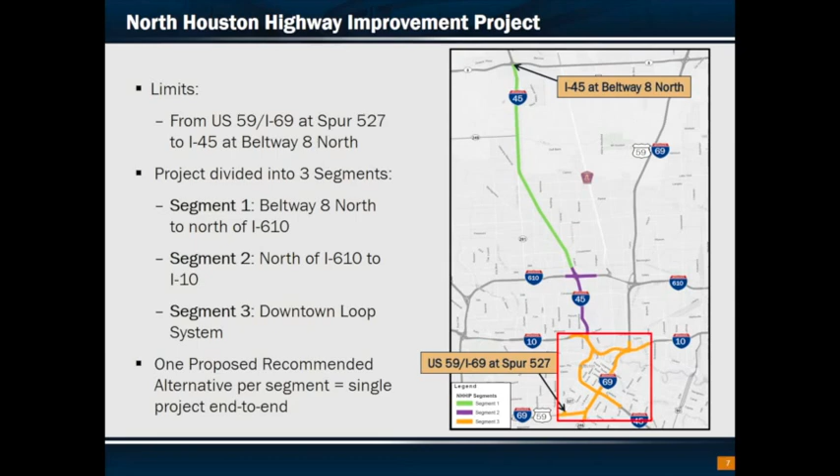To facilitate the development and evaluation of alternatives, the study area was divided into 3 study segments. Segment 1 is the north segment, from Beltway 8 North to approximately I-610, the North Loop. Segment 2 is the middle segment from approximately I-610 to approximately I-10. And Segment 3 is the downtown loop system, which includes portions of I-45, I-10, and I-69 in the downtown area, and State Highway 288 and Spur 527 south of downtown.

The proposed North Houston Highway Improvement Project is needed for several reasons. There is inadequate highway capacity for existing and future traffic demands on the highways in the North Houston corridor. Between the years 2015 and 2040, average daily traffic volumes in the project corridor are projected to increase by as much as 30%. Traffic congestion, which is measured by traffic volume and roadway capacity, will increase if no improvements are made.

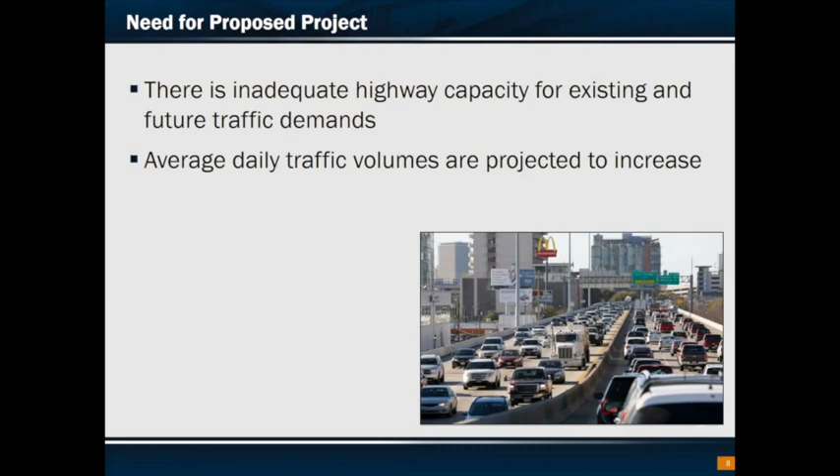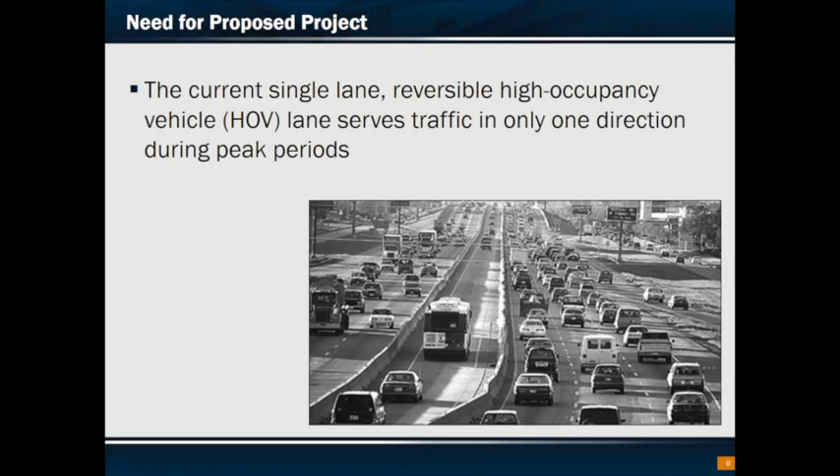The current high-occupancy vehicle, or HOV lane on I-45 serves traffic in only one direction during the peak traffic periods and is unused for large portions of the day. During peak hours, the HOV lane is congested. I-45 is a designated evacuation route for the region. At its present capacity, evacuation effectiveness would be limited in the event of a hurricane or other regional emergency.

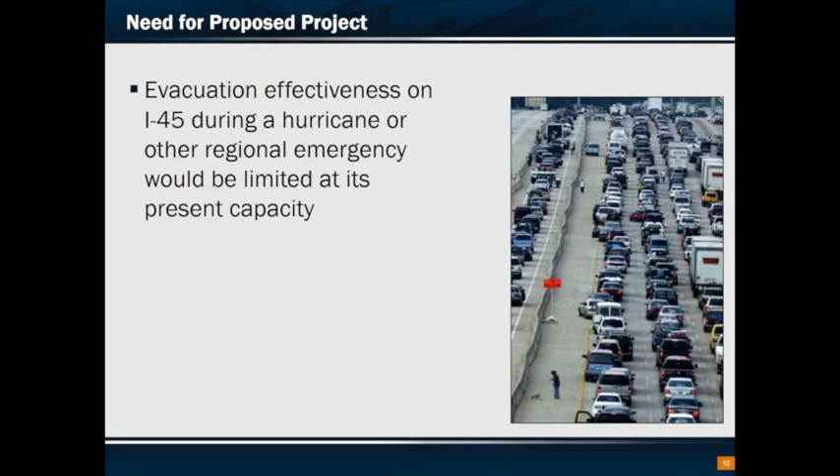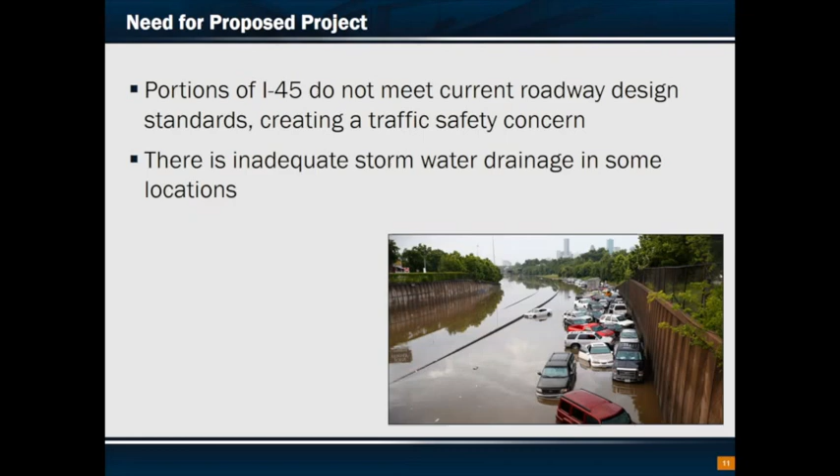Portions of I-45 do not meet current roadway design standards, creating a traffic safety concern. Roadway design deficiencies also include inadequate stormwater drainage in some locations. Intense rainfall causes high water levels at the I-45 I-10 underpass and on the outside lanes. I-45 would not operate effectively as an evacuation route with high water closures, especially during hurricane evacuations when high rainfall events are likely.

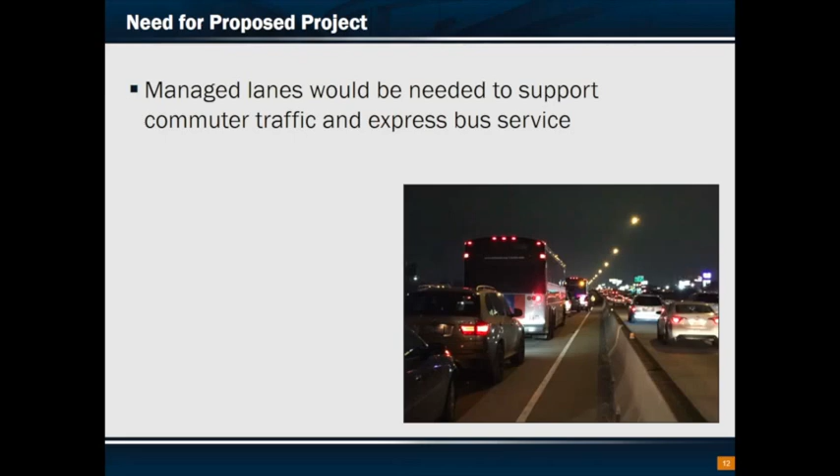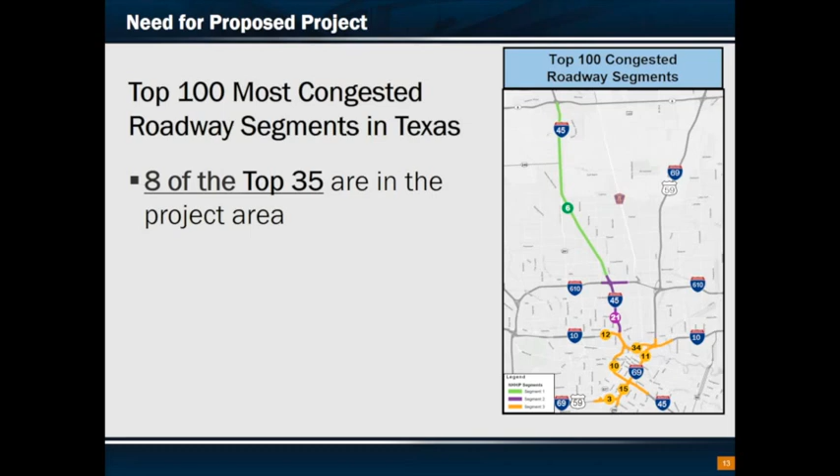Forecasts for commuter service indicate that even with parallel high-capacity transit in the corridor, two-way managed lanes would be needed to support commuter traffic and express bus service. Also, in the most recent ranking of the top 100 most congested roadways in Texas, 8 of the top 35 are in the project area. The purpose of the proposed project is to provide a highway facility with additional capacity in the I-45 Hardy Toll Road corridor to manage congestion, improve mobility, enhance safety, and provide travelers with options to reach their destinations.

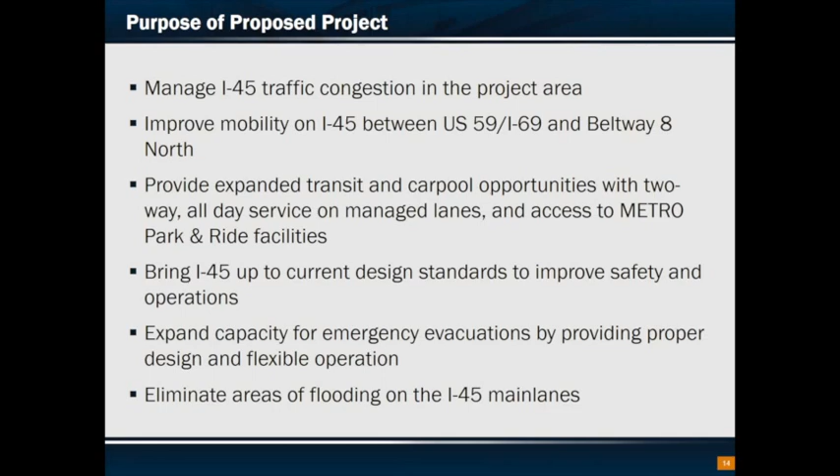Based on the evaluation of alternatives, one proposed recommended alternative was identified for each study segment. The proposed recommended alternative for Segment 1 would provide new capacity by adding 4 managed express lanes, also known as MAX lanes, 1 additional frontage road lane in each direction, and safety features, including full-width shoulders and accommodations for bicycles and pedestrians along the frontage roads. The MAX lanes would include both HOV and toll operations. New right-of-way would be acquired primarily from the west side of I-45.

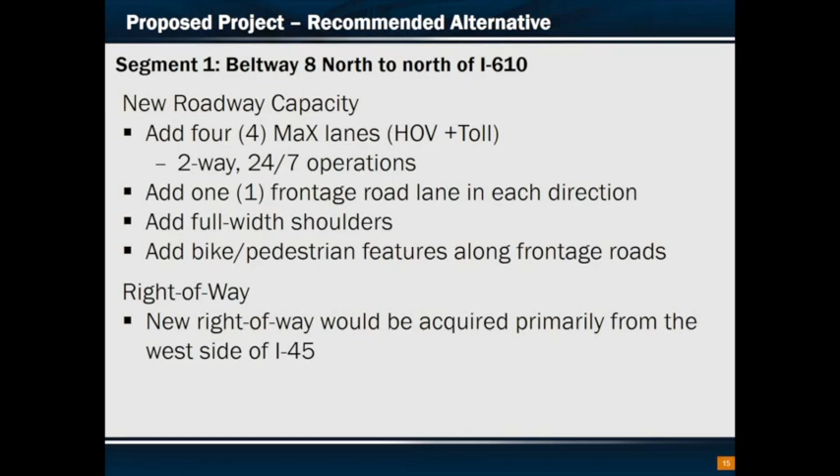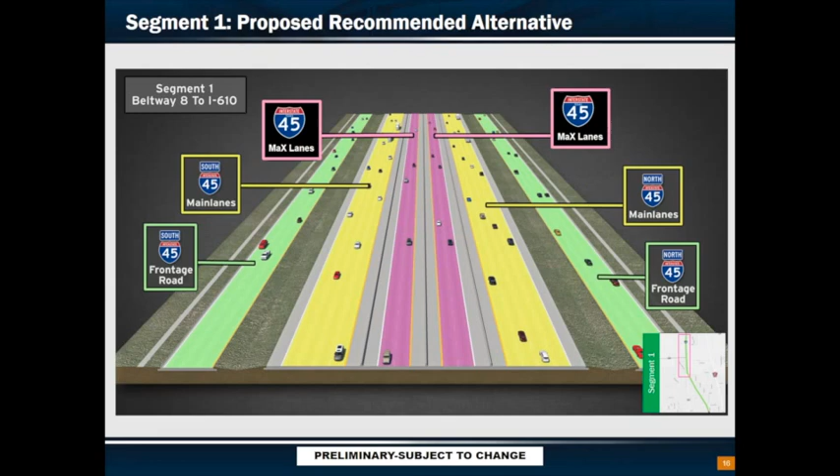This graphic is a rendering that shows I-45 in Segment 1 between Beltway 8 North and I-610. The proposed project includes 4 general-purpose lanes in each direction, 2 MAX lanes in each direction, and 3 frontage road lanes in each direction. Proposed improvements in Segment 2 include adding 2 MAX lanes in each direction. Added safety features would include full-width shoulders and accommodations for bicycles and pedestrians along the frontage roads. In Segment 2, the project right-of-way is constrained by Hollywood Cemetery, Germantown Historic District, and Woodland Park.

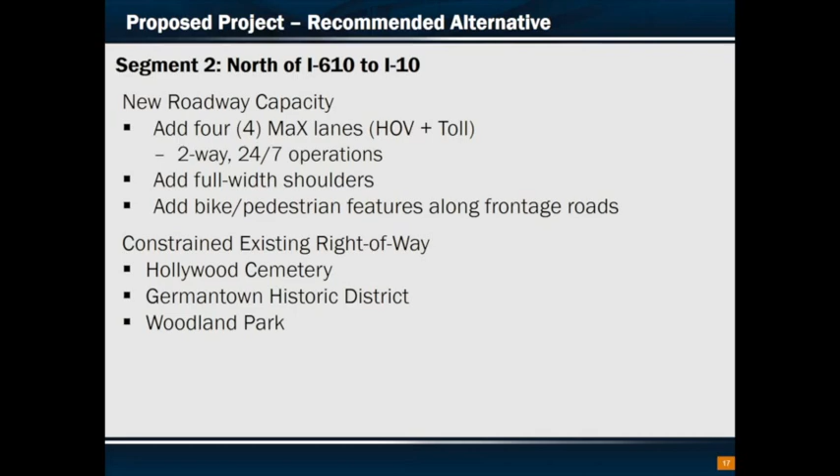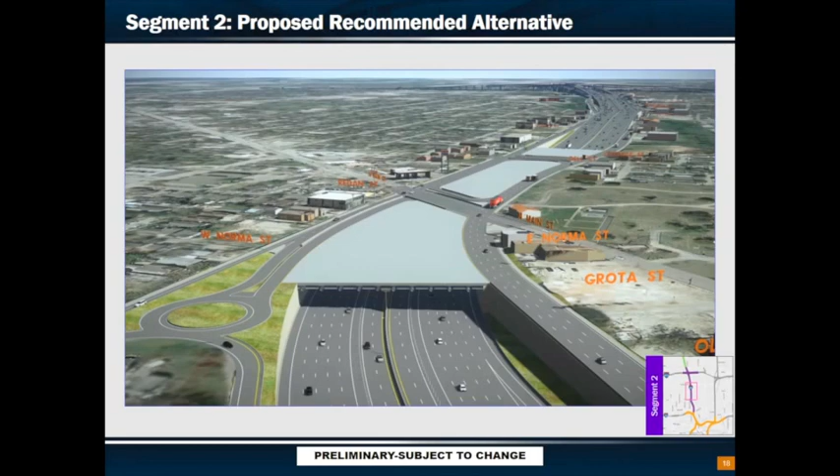This rendering shows the Segment 2 area near North Main Street, looking north at the depressed section of I-45. The general-purpose lanes and MAX lanes would be below grade, and the frontage roads would be at grade. This image shows a concept where the area between the frontage roads could be used as open space. The open space option is conceptual and would require additional development and funding partners to bring the concept to fruition.

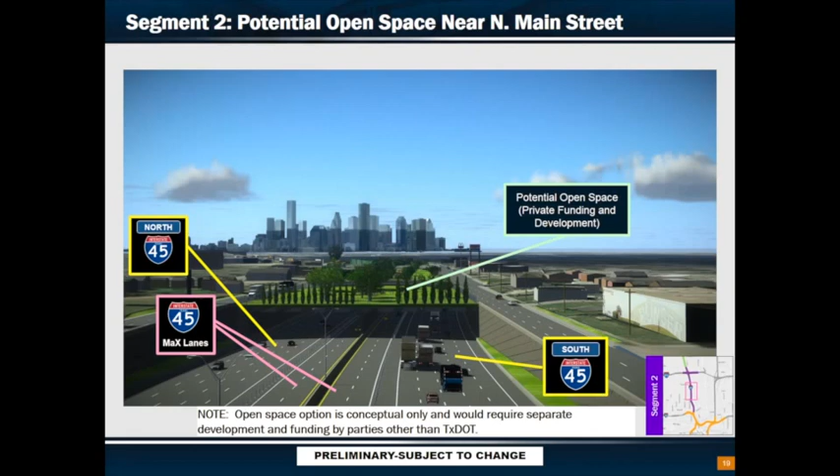In Segment 3, in the downtown Houston area, the proposed recommended alternative would reroute I-45 to be parallel with I-10 on the north side of downtown and parallel to I-69 on the east side of downtown. Portions of I-10 and I-69 would be realigned to improve the existing horizontal curves, which would enhance safety and mobility.

I-69 would be depressed from the east side of downtown to Spur 527. The existing elevated section of I-45 on the west and south sides of downtown Houston, known as the Pierce Elevated, would be replaced by downtown connectors that would allow access to and from various downtown streets. 2 express lanes in each direction would be constructed on I-10 from west of I-45 to east of I-69 to allow through traffic on I-10 to bypass downtown Houston. The I-45 managed lanes from north of I-10 would terminate on the north side of downtown Houston at the same streets as the existing HOV lane.

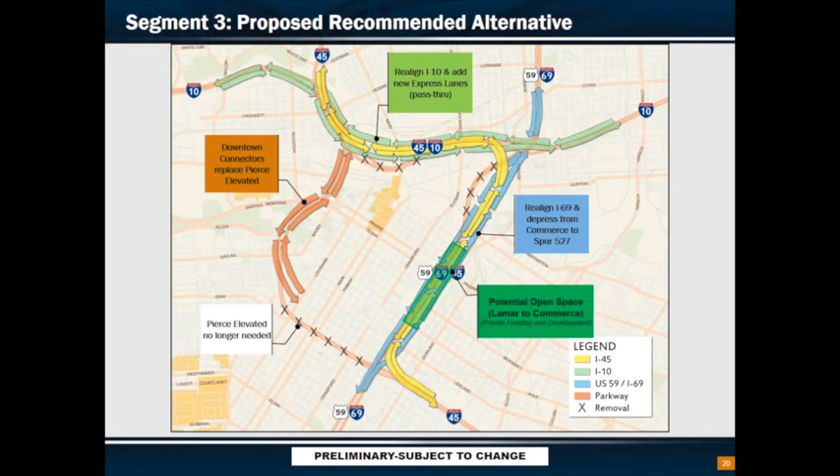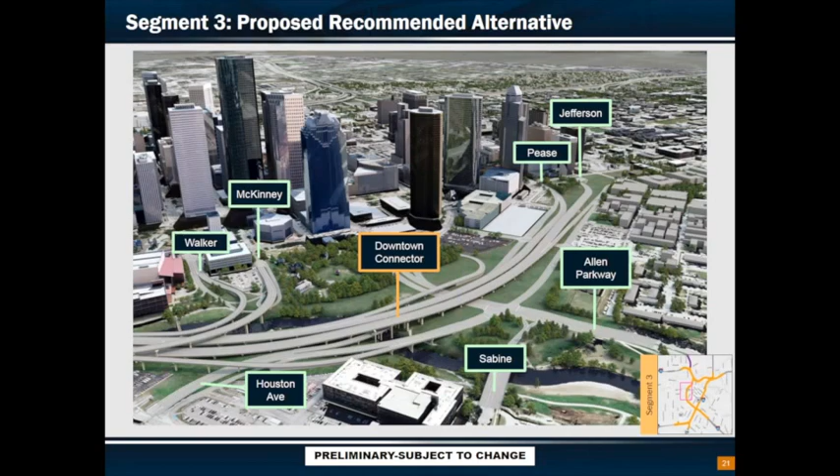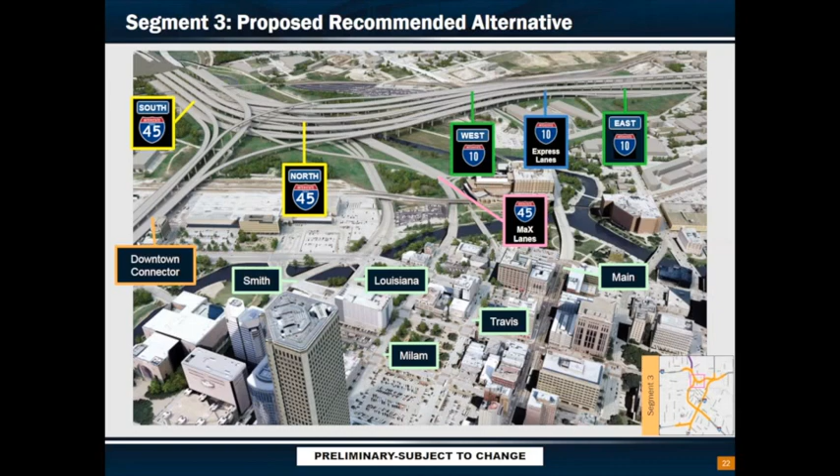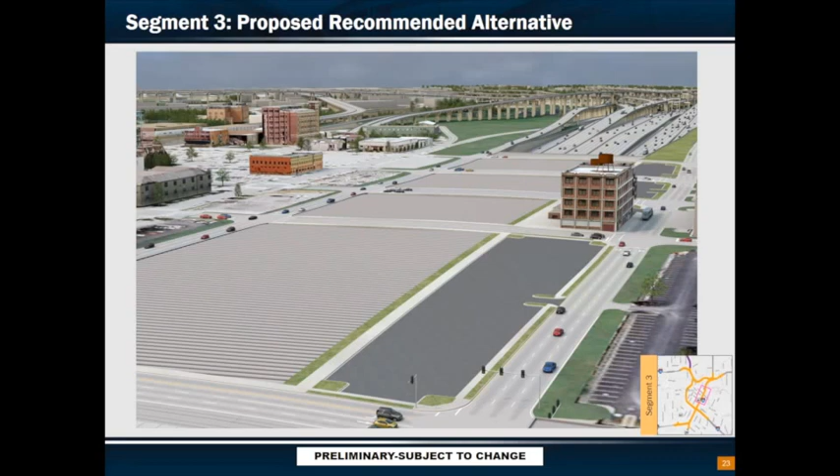This image shows the proposed project on the east side of downtown looking north. I-69 would be depressed from Commerce Street to Spur 527. I-45 would be depressed from Commerce Street to Lamar Street. Similar to the depressed section of I-45 in Segment 2, the depressed section of I-45 and I-69 on the east side of downtown would provide the opportunity for a structural cap over the depressed lanes that could be used as open space. The open space option is conceptual and would require additional development and funding partners to bring the concept to fruition.

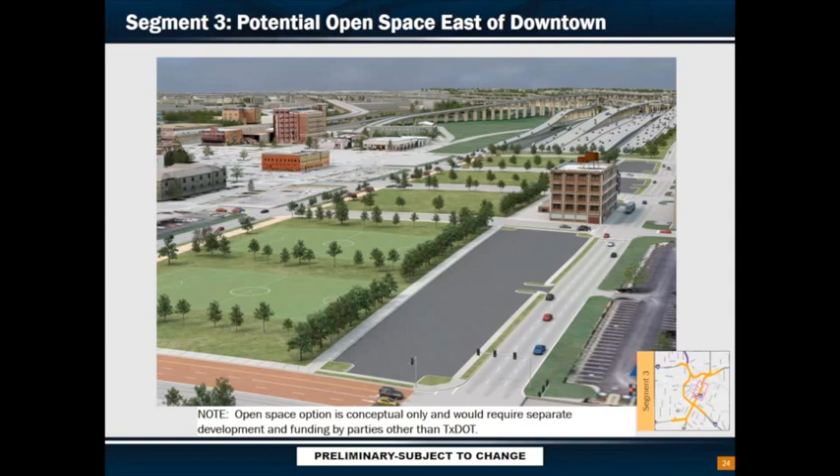Proposed design changes that are not documented in the Draft Environmental Impact Statement, or Draft EIS, are being considered for the proposed recommended alternative. A preliminary drainage study for the project recommends the addition of stormwater detention sites. Most of the detention areas would be within the project right-of-way. Proposed roadway design changes include modifications to some entrance and exit ramps, highway interchanges, and frontage roads. In some areas, right-of-way needs would be reduced. Overall, the stormwater detention and roadway design changes would require approximately 58 acres of new right-of-way, in addition to what was evaluated in the draft EIS.

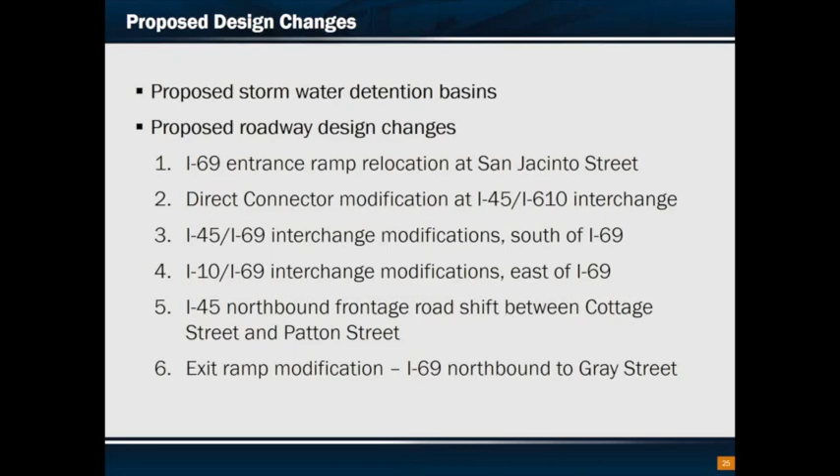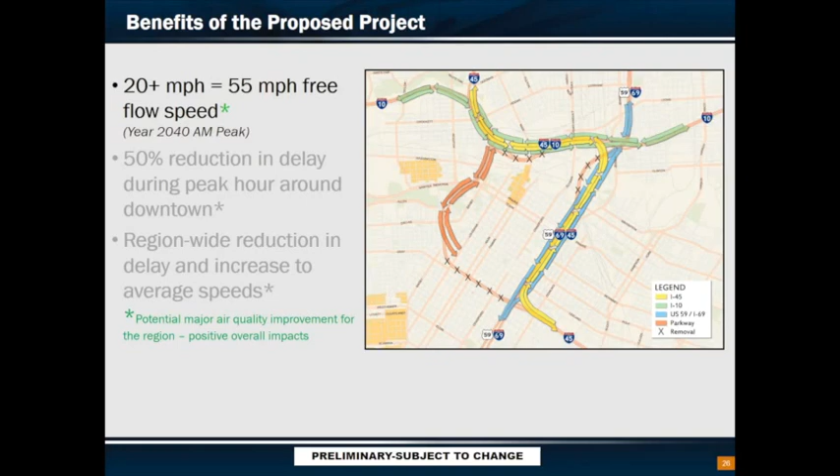The proposed changes are shown on the exhibits in the open house area at tonight's hearing, and are also on the project website. These and any other design changes that could result, based on input during the comment period, will be documented in the next phase of the study process, which will be the preparation of the final EIS. Anticipated benefits of the proposed project include an expected increase in travel speeds of 20+ miles per hour in the downtown area, a 50% reduction in traffic delay during the peak hour, and a region-wide reduction in delay, with increases in traffic speeds.

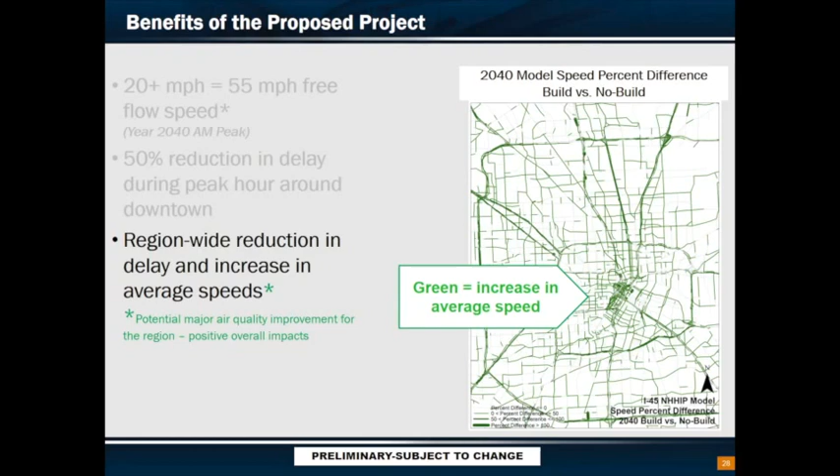The estimated construction cost for the proposed project is approximately $7 billion in today's dollars. Funding for initial phases of construction has been identified. Construction is anticipated to begin in 2020. The first project is expected to be the section of I-69 from Spur 527 to State Highway 288. Construction would be phased as additional funding is identified and would likely progress from south to north.

A draft environmental impact statement has been prepared for the proposed project and is available tonight for your review. The draft EIS evaluates the build alternatives and the no-build alternative. The draft EIS presents existing conditions in the project area and the evaluation of potential impacts of the proposed project. It also summarizes coordination with stakeholders, including the public and agencies. As part of the draft EIS process, natural, cultural, social, and economic resources were evaluated for impacts potentially resulting from implementation of the proposed project.

As documented in the draft EIS, the evaluation indicates that there would be potential impacts as a result of the proposed project. We'll discuss some of these topics in this presentation. Details of the impact analyses are in the draft EIS and associated technical reports, which can be viewed at the environmental table in the open house area.

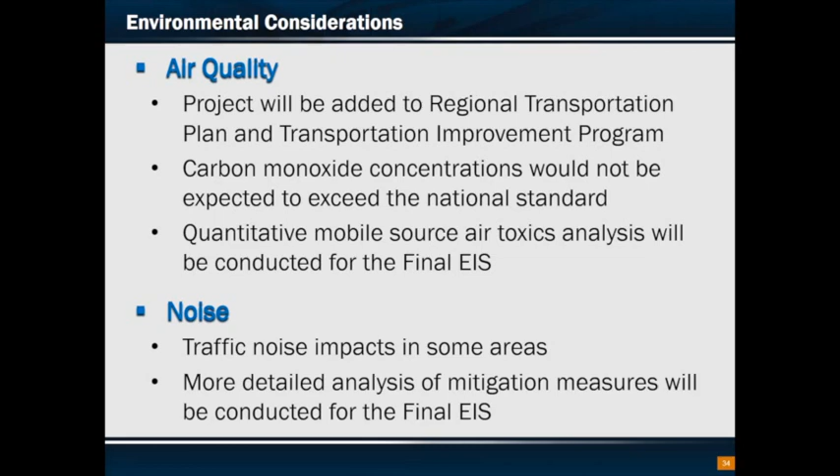The project would be designed not to increase flood risk. Pump stations would be provided to manage drainage in proposed depressed areas. Impacts to water bodies and wetlands would be avoided or minimized. Required permits would be obtained prior to construction.

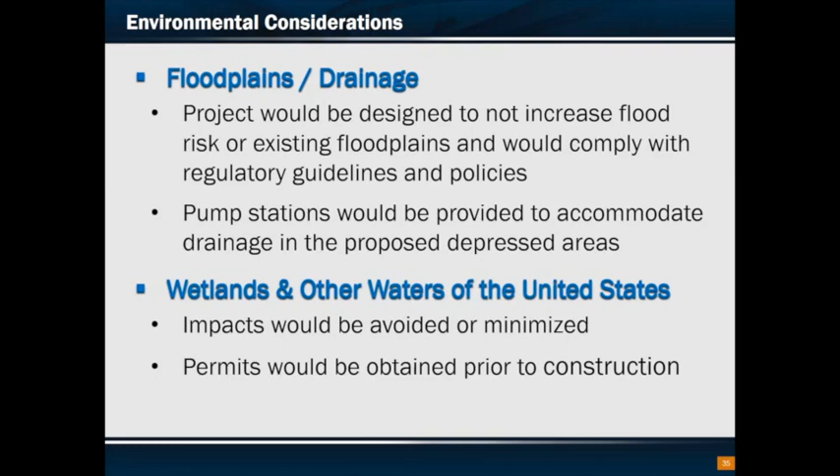An archaeological survey was conducted on some properties within the project right-of-way. No archaeological resources were identified. Additional studies will be conducted for the final EIS. The proposed project would directly affect 6 historic resources. Studies are ongoing and TxDOT is coordinating with consulting parties, including the Texas Historical Commission. The final EIS will document the final effects determination.

There are sites within the project area that are considered at risk for containing hazardous materials. TxDOT will perform additional investigations and identify any required sampling, analysis, remediation, and soil or groundwater management. The proposed project is generally compatible with the existing visual environment and is not anticipated to degrade the visual quality of the project area. Visual sight lines would be enhanced where the existing Pierce elevated and I-69 elevated structures would be removed.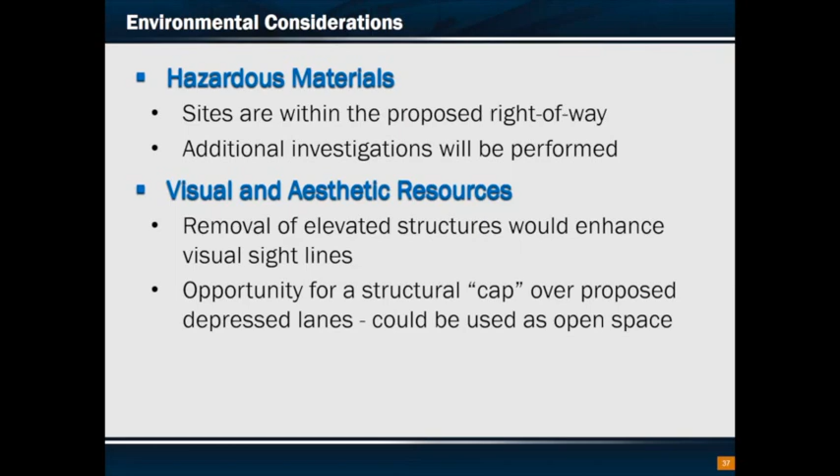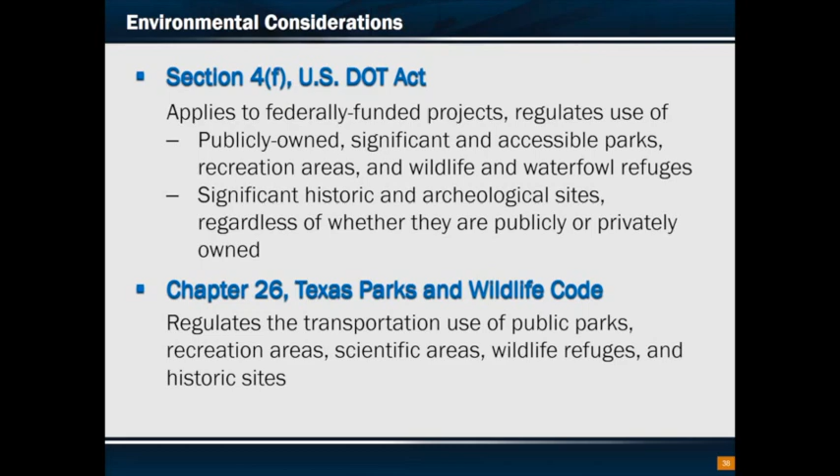Section 4(f) of the U.S. Department of Transportation Act applies to this project because the proposed new right-of-way would impact publicly owned parks and significant historic sites, as defined by Section 4(f). On the state level, Chapter 26 of the Texas Parks and Wildlife Code is a state regulatory requirement that also applies to this project because of impacts to public parks.

2 historic buildings, known as the Carlisle Plastics and Readers Wholesale Distributors warehouses, would be adversely impacted by the proposed project. Effects to the historic Cheek Neal Coffee Company building are under review. Historic studies and related consultation are ongoing, and the final EIS will document the final effects determination for historic resources.

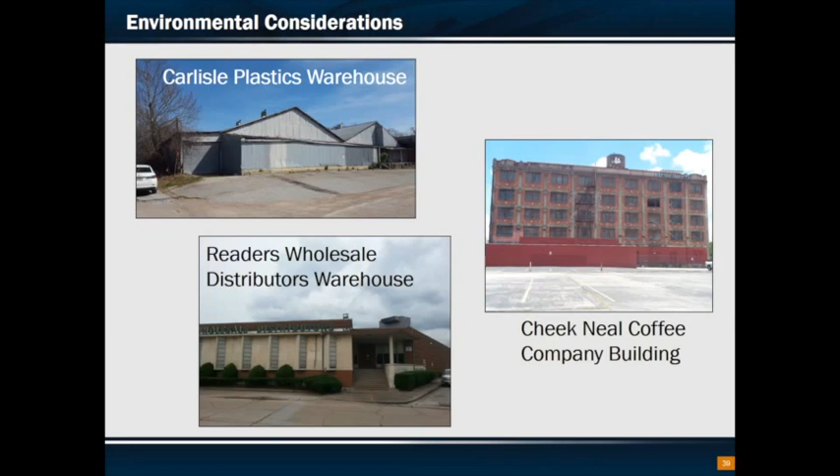Freed Art and Nature Park occupies approximately 6.2 acres of land northwest of the I-45 and I-10 interchange, at the corner of Houston Avenue and White Oak Drive. The park is heavily wooded in some areas, is designated for passive use, and is partly bordered by paved trails that connect to some nearby parks and trails. As a result of the proposed project, approximately 0.21 acre of the park would become roadway right-of-way that would be owned by the state of Texas.

TxDOT has designed the proposed project to minimize the impacts of right-of-way acquisition in this area as much as possible. Alternatives that would not impact the park would not meet highway design criteria, which is a traffic safety concern. The proposed right-of-way is needed to accommodate an elevated direct connector from I-45 to I-10.

Except where columns to support the roadway structure would be placed in the right-of-way, the area may be able to retain vegetation similar to the existing vegetation. A small portion of a trail at the southern edge of the existing park would be reestablished as soon as possible following construction.

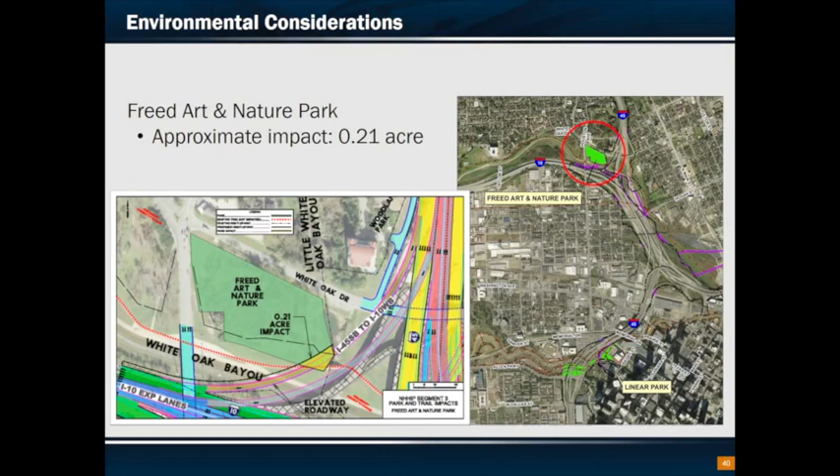Linear Park currently occupies approximately 6.8 acres of land on the south banks of Buffalo Bayou, on the west side of downtown Houston. The park has paved trails that connect to other trails along Buffalo Bayou. Portions of the park and trails are below the existing I-45 elevated structures.

As a result of the proposed project, approximately 0.15 acre of Linear Park would become roadway right-of-way that would be owned by the state of Texas. The area impacted does not have built recreation facilities except for the trail.

TxDOT has designed the proposed project to minimize right-of-way acquisition in this area as much as possible. Alternatives that would not impact the park would not meet highway design criteria. The trail within the project right-of-way would be re-established as soon as possible following project construction to reconnect existing trails.

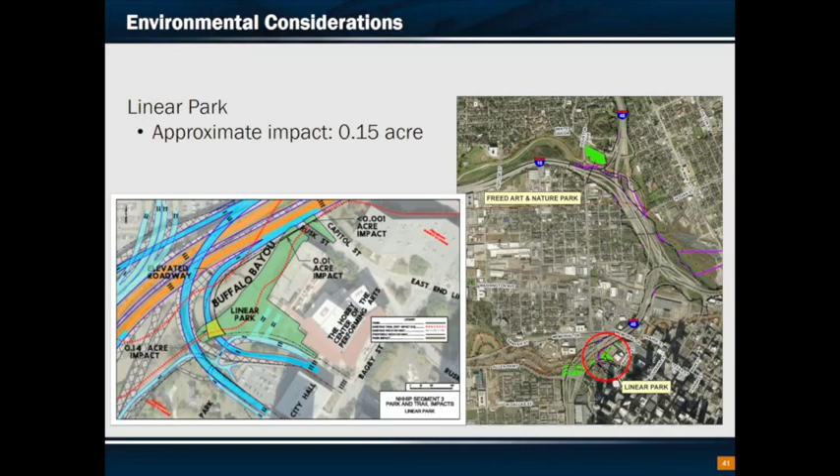TxDOT has preliminarily determined that the impacts from the project to Freed Art and Nature Park and Linear Park would be de minimis, which means that the impacts would be minimal in nature and would not substantially change the park land's uses as City of Houston parks.

TxDOT will continue coordinating with the City of Houston, which is the official with jurisdiction, to ensure that the proposed project will not adversely affect the activities, features, or attributes that make the parks eligible for Section 4(f) protection.

Before approving the use of land protected by Chapter 26, TxDOT must determine that there is no feasible and prudent alternative to the use or taking of the park land, and the project includes all reasonable planning to minimize harm to the land as a park, resulting from the use or taking.

This hearing is an opportunity for public review and comment on the impacts of the proposed project, including the preliminary de minimis impact determinations.

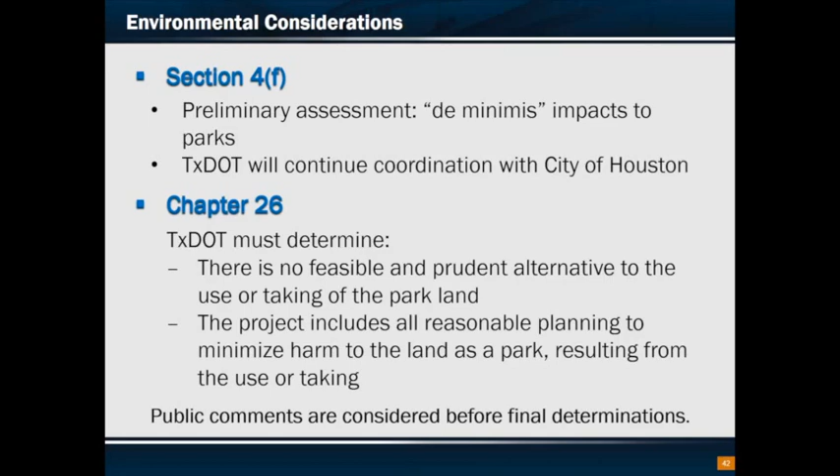In the next steps of the environmental process, all comments received tonight, as well as written comments received during the comment period, will be included in the official public hearing record and will be addressed in the next phase of the environmental process, which is the preparation of the final EIS.

The draft EIS and all related technical reports are available for public review after this public hearing at the TxDOT Houston District Office, on TxDOT's website, on the project website, and in several local libraries. In addition, should you wish to obtain a copy for your personal use, paper copies may be purchased for the cost of reproduction.

We will now show 3-dimensional visualizations of the proposed project, beginning with Segment 3 in the downtown area and concluding with Segment 1 at Beltway 8 North. All visualizations will be moving in a northerly direction. After the series of visualizations, we will begin the public comment session.

The visualization for Segment 3 will now begin. The visualization will start at Spur 527 south of downtown and will conclude at the proposed downtown connectors on the west side of downtown.

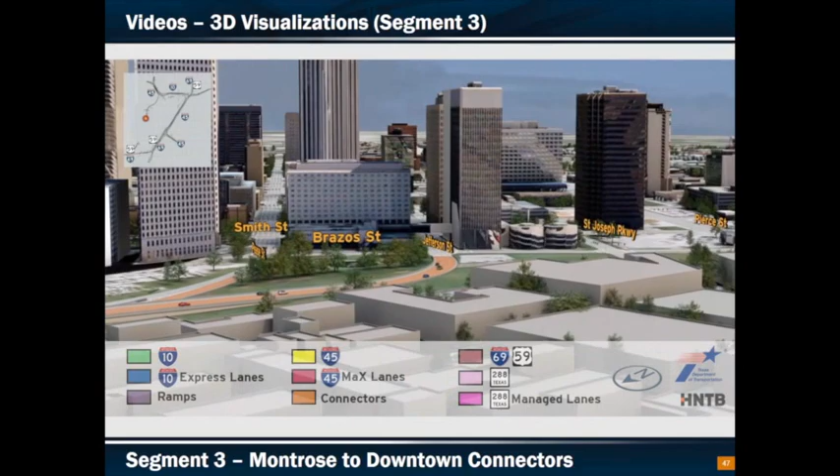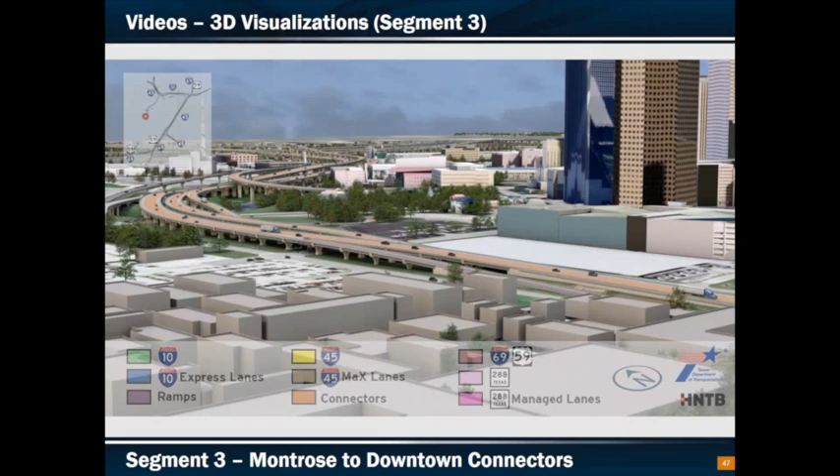The visualization for Segment 2 will now begin. The visualization will start at Quitman Street and will terminate at the I-610 interchange.